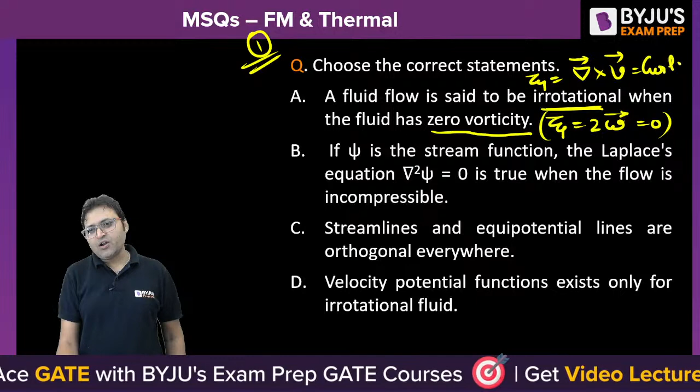Statement A says a fluid flow is said to be irrotational when the fluid has 0 vorticity. Vorticity is twice of angular velocity, and if this is 0, we can say that is called del cross V, or curl of V. If curl of V is equal to 0, then the flow is definitely irrotational. A is correct.

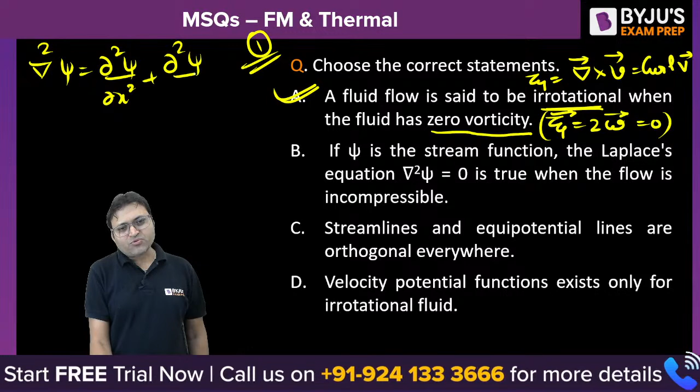What about B? Psi is the stream function. Yes, the Laplace equation del square psi is equal to 0. What is del square psi? That is equal to del square psi by del x square plus del square psi by del y square, equal to 0. This is called the Laplace equation for psi.

The Laplace equation is true when the flow is incompressible. Do you know psi exists for all types of 2-dimensional incompressible flow? So existence of stream function guarantees the flow possibility. The flow is incompressible when psi exists. It does not have to satisfy the Laplace equation.

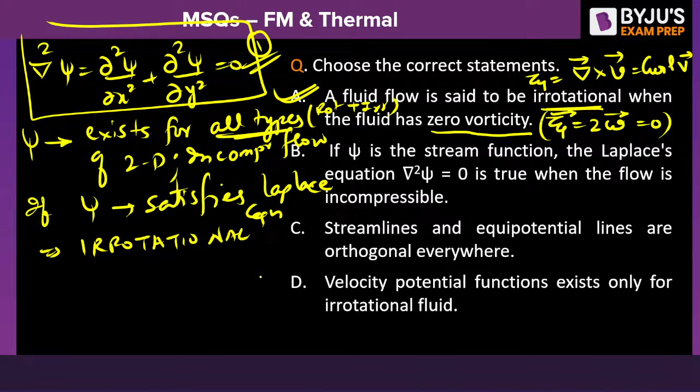When psi satisfies Laplace equation, here people commit a mistake. All types means rotational plus irrotational. If psi satisfies Laplace equation, then the flow is irrotational. Flow is always incompressible. For the flow to be 2-dimensional incompressible, psi does not have to satisfy the Laplace equation. When psi satisfies Laplace equation, the flow is irrotational.

Do you agree with the statement B, which is incorrect? Do you guys agree with the statement B, which is incorrect?

Statement C says stream lines and equipotential lines are orthogonal everywhere. Do you remember? Except at the stagnation point. What is the stagnation point? The point of 0 velocity. At that point the condition does not apply. So stream lines and equipotential lines are always orthogonal to each other in a flow field except at stagnation point. So there is some condition for this. That is the reason statement C is also incorrect.

Velocity potential function exists only for irrotational flow. That is true, that is why potential flow is also called ideal flow. So only A and D. That is how you need to understand each and every statement carefully.

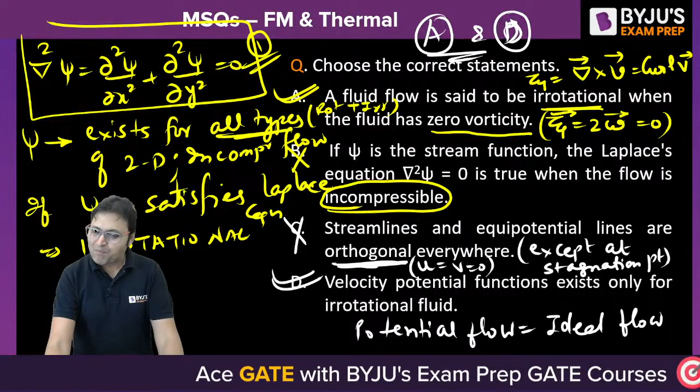It will become more interesting, more fun, more lively, more energetic, right? And more fruitful. The next question, question number 2 on your screen.

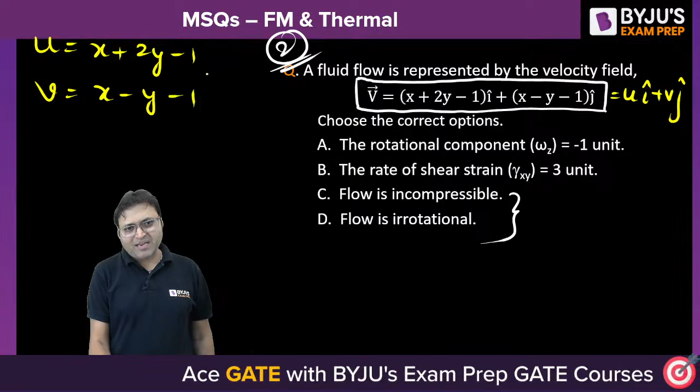Yes. Question number 2, waiting for your response. Everybody please give it a try. First of all, please check whether it is incompressible or compressible out of C and D option.

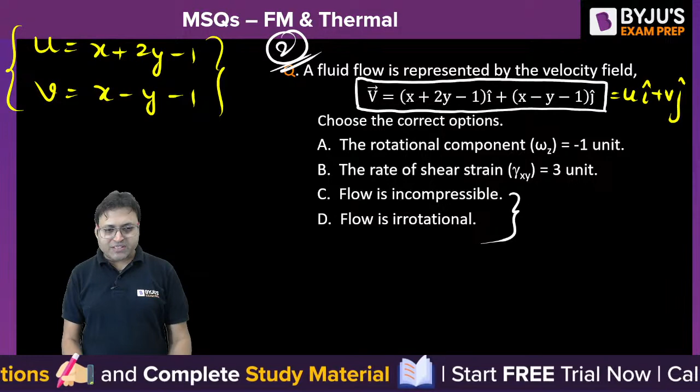Is option C correct or incorrect? How do we check whether a flow is incompressible? We apply the continuity equation for two-dimensional incompressible flow: del u by del x plus del v by del y must be equal to 0.

So what is our LHS? Del u by del x, that is 1, plus del v by del y, that is -1, is equal to 0, equal to RHS. So definitely the flow is incompressible.

Check whether the flow is rotational or irrotational. Find out the angular velocity about the z axis. It is the average of the rate of change of angles of initially drawn perpendicular line segments: del v by del x minus del u by del y. So half of del v by del x, that is 1, minus del u by del y, that is 2. So that becomes -1 by 2, that is 1 minus 2.

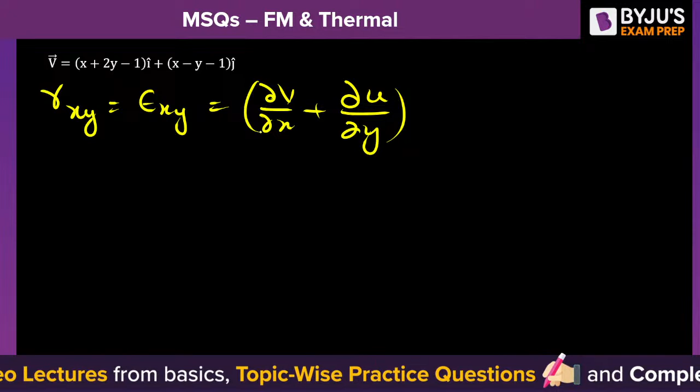What about the rate of shear strain? Epsilon xy is equal to the total rate of change of angles, del v by del x plus del u by del y. Here it will be plus, and half will not be there. So del v by del x is 1, plus del u by del y, that is 2. So this will be 3 units. So the rate of angular deformation or rate of shear strain is definitely 3 units.

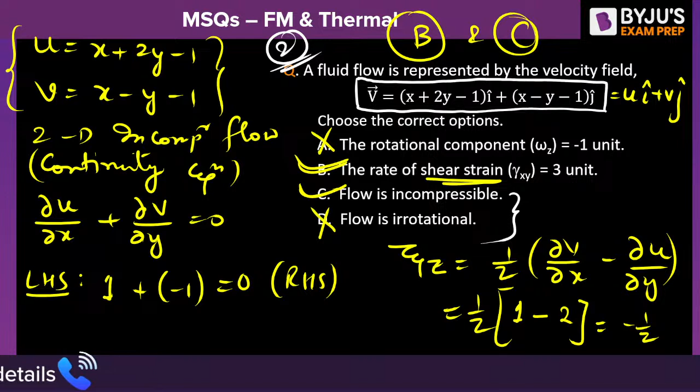So B and C will be the right answer for this one, isn't it? Are you able to understand it? Option B and C are the correct answers.

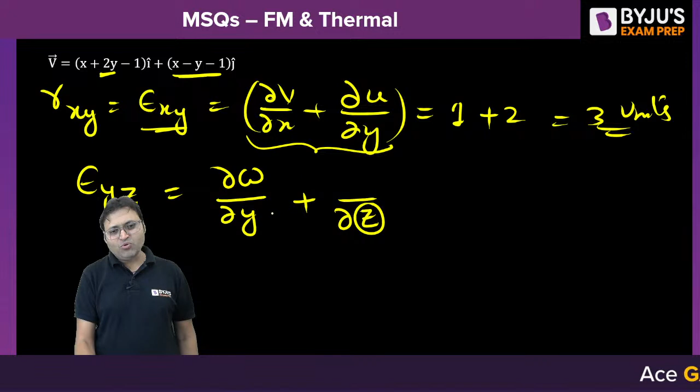If we want to write the rate of angular deformation in the yz plane, then here it will be del y and here it will be del z. The velocity in the z direction is del w, and the numerator of the second term will be the velocity in the y direction. Similarly, epsilon zx will be equal to, here del z, here del x, so it will be del u here, del w here.

So these are the rate of angular deformation which we use in Newton's law of viscosity. Rate of angular deformation, or rate of shear strain, or strain rate, we can also simply call it strain rate.

Pankaj, clear? This is the parameter we use in Newton's law of viscosity: tau is equal to mu into d theta by dt. D theta by dt is the rate of angular deformation.

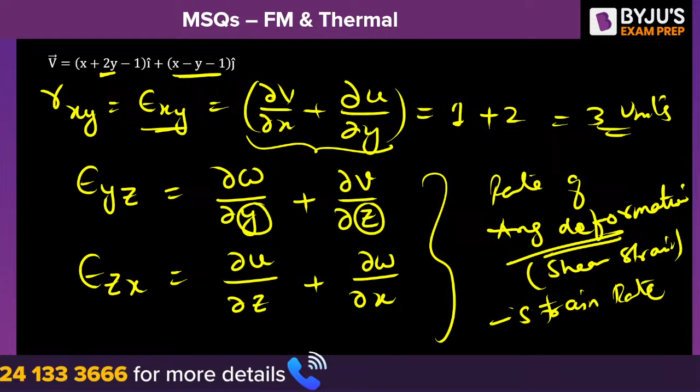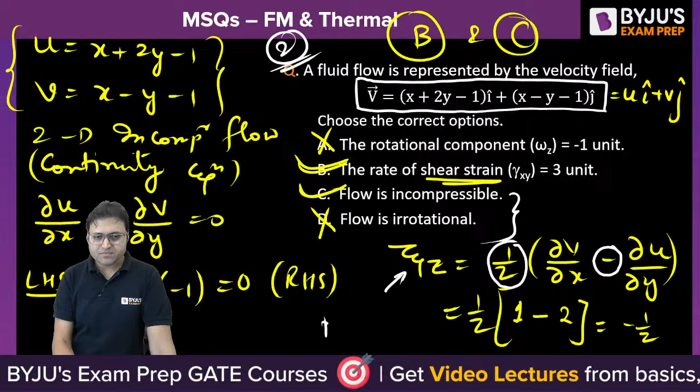There is a slight difference between angular velocity and rate of angular deformation. Try to understand that difference. One difference is that angular velocity has a negative sign in between the terms, and it is the average, so multiplied by half. So angular velocity will have half, then the negative sign in between the terms. That is the angular velocity. I hope it is clear.

The next question is wonderful, question number 3. Try to solve the next one. It might be a little time consuming. The question is about the acceleration of the particle at x equal to 1, y equal to minus 1.

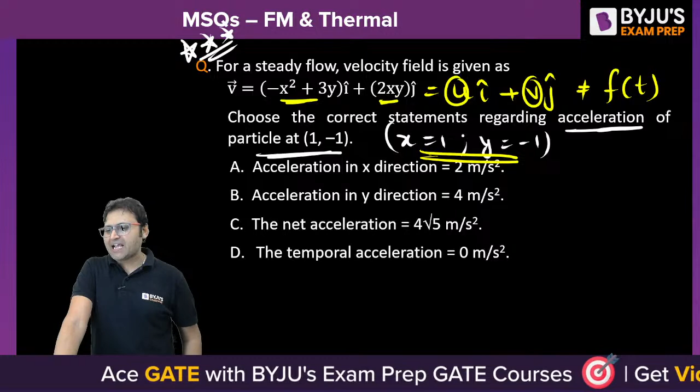We need to find out the acceleration for the given velocity. Can we write it as u i cap plus v j cap? It is not a function of time, there is no time involved, so is D correct or incorrect? Find out the expression for u, find out the expression for v, and you need to find the acceleration in x direction, acceleration in y direction, and the net acceleration. Everybody please give it a try. This is question number 3.

Let me give you a hint that option D is correct, definitely correct, because velocity is not a function of time. That is why the temporal or local acceleration is 0. Temporal acceleration means local acceleration. So D will be correct. Now out of A, B and C.

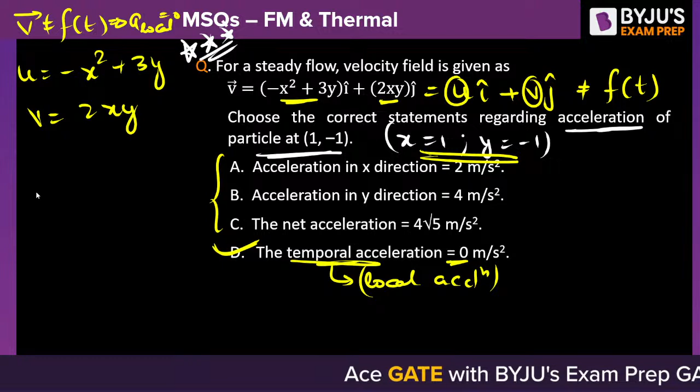So u is equal to minus x square plus 3y, and v is equal to 2xy. Now what is the acceleration in x direction? It is just a formula based question: ax equals u into del u by del x plus v into del u by del y. So u is minus x square plus 3y, into del u by del x, which is minus 2x, then plus v, that is 2xy, into del u by del y, which is 3.

Did I write it correctly? X is equal to 1, Y is equal to minus 1, Y is equal to minus 1. Tell me.

Minus 2x minus x square plus 3y square. It is not 3y square, sorry, it is not 3y square. It is 3y, it is 3y. So y is equal to minus 1, y is equal to minus 1, so it will be minus, so it will become, sorry,

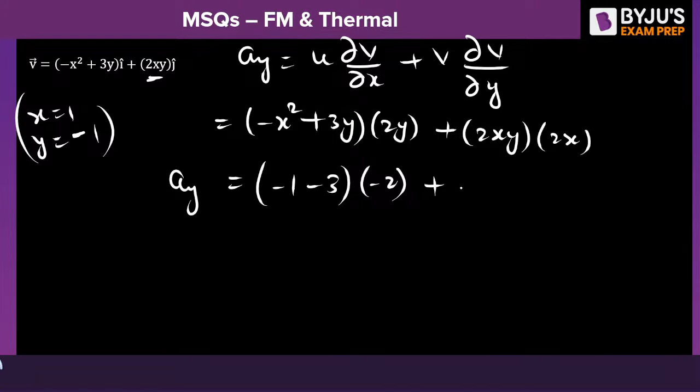Put the values. So AY is equal to, x is equal to 1, so minus 1, minus 3, then 2y, that will be minus 2, plus 2xy, minus 2 into 2x, then 2. So it will be 8 minus 4, 4 units. AY will be 4. AY will be 4. B is also correct.

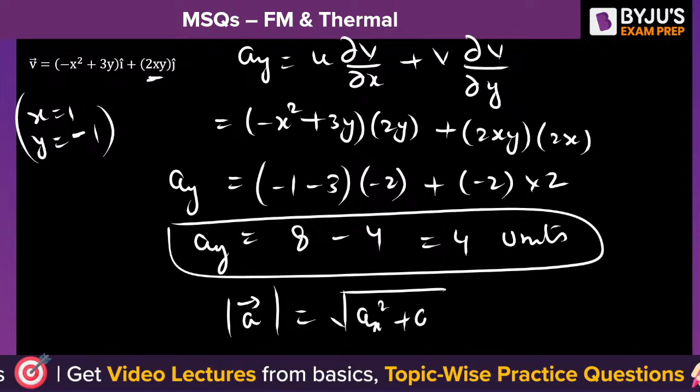What about C? What about C? The net acceleration is equal to under root of ax square plus ay square, that is under root of 2 square plus 4 square, that is root 20, that is 2 root 5. It will be 2 root 5. It will not be 4 root 5.

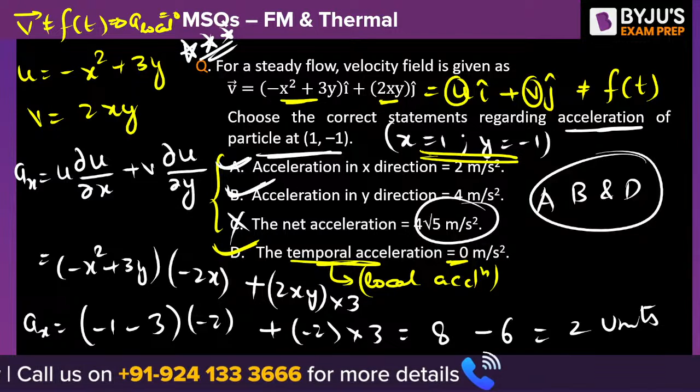It will be 2 root 5. So A, B and D are the correct options. A, B and D are correct answers. Yes, well done. A, B and D will be the right answer for this one. I hope it is clear. Total acceleration is 2 root 5, 4.47, correct. It will not be 4 root 5. So option C is incorrect. A and B are correct and D is also correct.

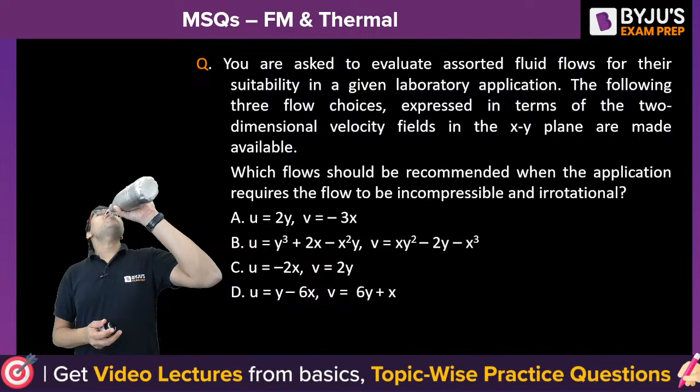The next question is simple, but can you do the calculation correctly? Next question you are supposed to give me the answer for. Next question you guys are supposed to solve.

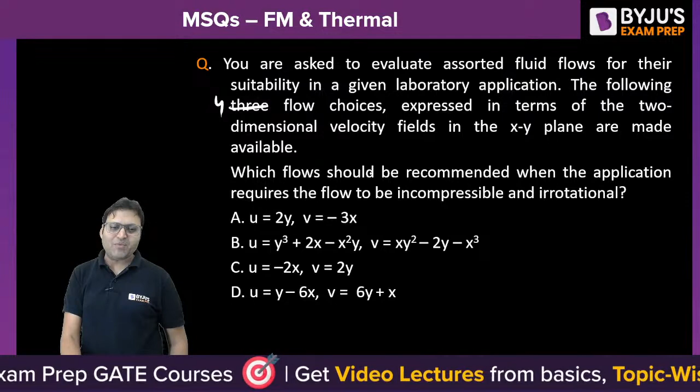So the next question, you are asked to evaluate assorted fluid flows for their suitability in a given laboratory application. There are 4 flow choices expressed in terms of a 2-dimensional velocity field in the x and y plane made available. Which flow should be recommended when the application requires the flow to be incompressible and irrotational?

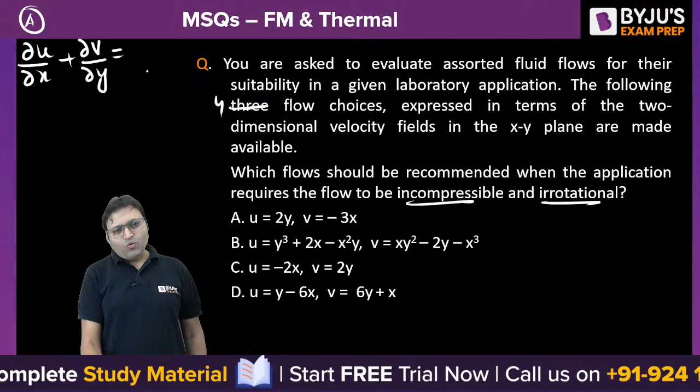Incompressible and irrotational. If we talk about A, what is del u by del x plus del v by del y? What is del u by del x? 0. What is del v by del y? 0, so it is equal to 0. It means incompressible. A is incompressible. What about irrotational?

Del V by del X minus del U by del Y, isn't it? Can you find out del V by del X minus del U by del Y? What is del V by del X? That is minus 3, minus del U by del Y, 2. That is not 0. It means rotational. So A cannot be the correct answer.

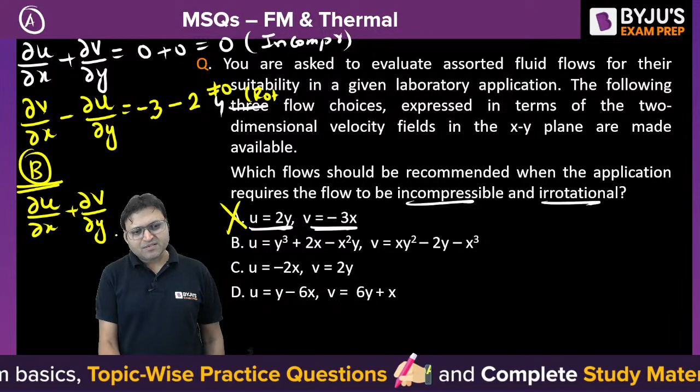A cannot be correct. Let us talk about B. What is del U by del X plus del V by del Y? Can you find out the value? Del U by del X, what is del U by del X? 2 minus 2xy, plus what is del V by del Y? That is 2xy minus 2. So do you get it? 0. So B is also incompressible.

And what about rotationality?

Del V by del X minus del U by del Y. What is del V by del X? Del V by del X is y square minus 3x square, then minus del U by del Y is 3y square minus 2x square. Del U by del Y, na, x square. So is it 0? It is not 0. It means it is also rotational. So A and B are incompressible but rotational flow.

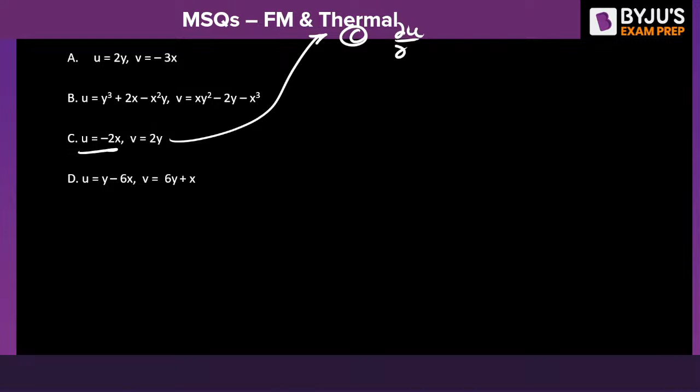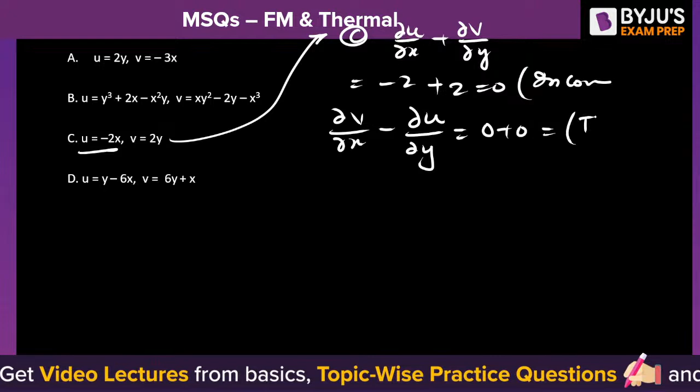Similarly, can you find out for C and D? If we talk about C, what is del U by del X? It is little time consuming though. Del U by del X is minus 2, plus what is del V by del Y? Then that is 2, so that is incompressible. And what is del V by del X minus del U by del Y? What is del V by del X? 0, 0. They are 0, 0. That is irrotational. So C is correct.

What about D? Option D. Del U by del X plus del V by del Y. What is del U by del X? Minus 6, plus del V by del Y, that is 6. 0. Incompressible.

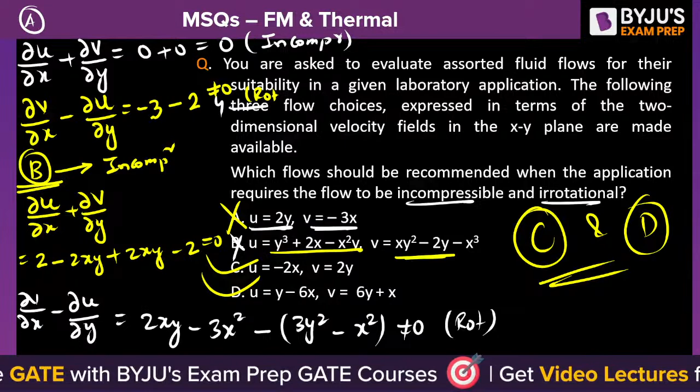All are incompressible. Then del V by del X minus del U by del Y. Do not commit the mistake. Del V by del X, that is 1, minus del U by del Y, that is 1. 1 minus 1, 0. That is irrotational. So C and D are incompressible as well as irrotational. C and D both are incompressible and irrotational. So answer to this question are C and D, isn't it? Answer to this question will be C and D.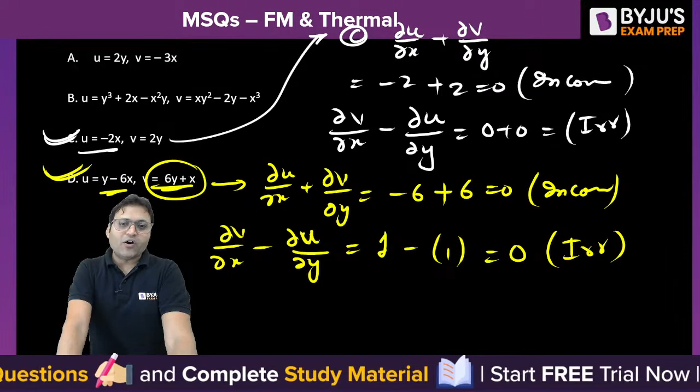I hope it is clear to everyone. Are you guys enjoying it or not? So there can be numericals also for MSQs. There can be theoretical questions. Theoretical questions are more confusing compared to numericals, right?

Let us move to the next one. The next question on your screen. Out of options A and B, one of them is correct, and out of C and D, one option is correct. Yes, in a Lagrangian system, the position of a fluid particle in the flow is described as, this is how the position changes in X direction and the position changes in Y direction by this expression, where T is the time while X0, Y0 and K are some random constants.

The flow is option A and B. Which of them is correct? The flow is... steady or unsteady? Yes, I want everyone to get me the answer. A and B, which of them is correct? Forget about C and D. Let me know whether the flow is steady or unsteady.

Do you know the definition of steady and unsteady flow? Will the flow be steady or unsteady? Every one of you, will the flow be steady or unsteady? Yes, it is fun. The flow will be steady only. No, it means you guys do not have

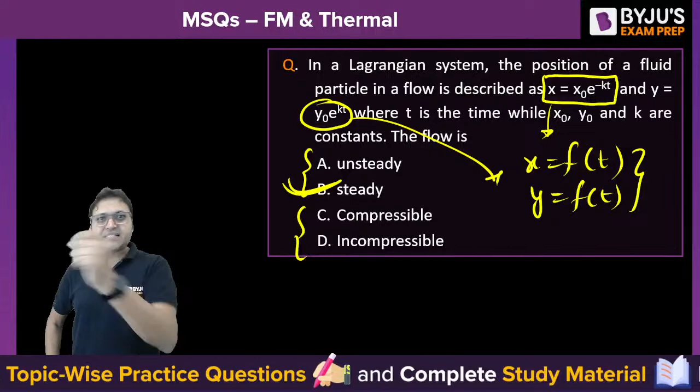Let me tell you, whenever there is a flow, the position of the particle will definitely change with time. Whether the flow is steady or unsteady, the position of the particle will always change with time, whether the flow is steady or unsteady. That will happen, right, the position of particles will change with time. So does this mean you are trying to say there cannot be a steady flow in reality? Is that what you are trying to say? Are you trying to say that steady flow does not exist?

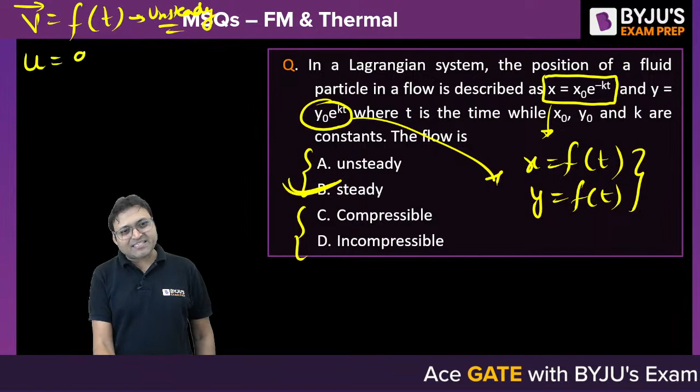So how to find out the velocity in x direction? This is dx by dt. U is equal to dx by dt. Can you find out the value of dx by dt? Differentiate with respect to time: x naught into minus k into e to the power minus kt, isn't it?

And x naught into e to the power minus kt is x only. So u is equal to minus kx.

Are you getting it? Similarly, v is equal to total derivative of y with time, dy by dt, and y is given by y naught e to the power kt. So it becomes y naught into k e to the power kt. Are you getting it or not? So y naught e to the power kt is again y. So v is equal to k into y.

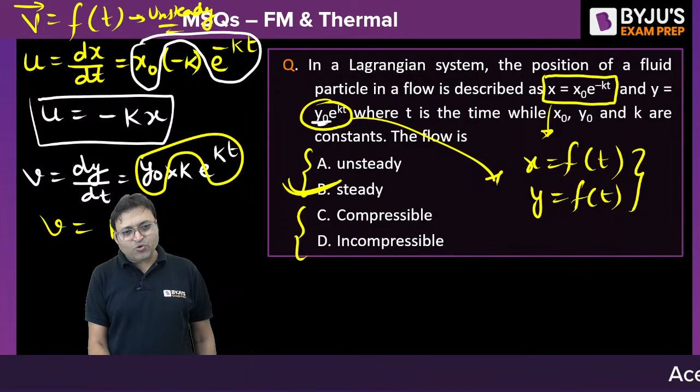So it is not a function of time, it is independent of time. U and v - can we say the velocity is a function of x and y only? So the flow is steady. Are you getting it or not? So the flow will be steady, it will not be unsteady.

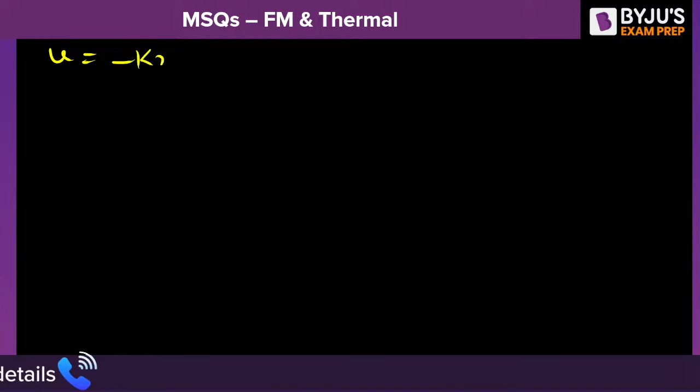Now you need to check whether the flow is compressible or incompressible. We can check: U is equal to minus kx, and V is equal to ky. So what is del u by del x plus del v by del y?

Check the continuity equation for two-dimensional incompressible flow. Del u by del x is what? Del u by del x is minus k, plus del v by del y, which is k. That equals 0. So it will be incompressible. The flow will be steady and incompressible.

B and D are the correct answers for this question.

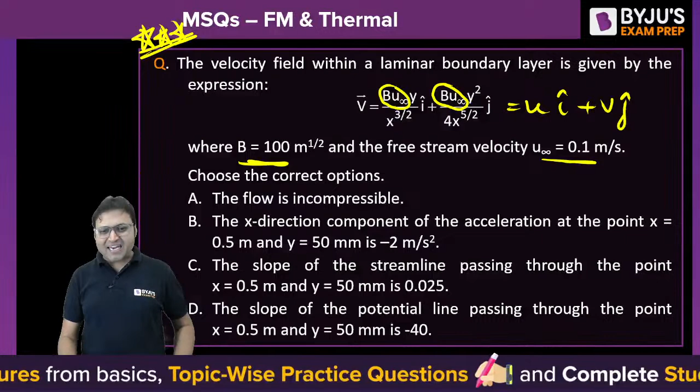The question says choose the correct option: the flow is incompressible. You need to check whether the flow is compressible or incompressible. The x direction component of acceleration at point x equals 0.5, y equals 50 mm, one in meter, another in mm, is -2, ax. Check whether ax is -2 or not. The slope of the streamline passing through the point x equals 0.5 and y equals 50 mm is 0.025. Let us first find out C and D option.

Let us try to focus on C and D. What is the slope of streamline? The slope of streamline is dy by dx is equal to v by u, isn't it? Slope of streamline, dy by dx is equal to v by u. What is v?

V is this expression. So can I write v as y square, because B into u infinity will get cancelled out. Let me write it as y square upon 4x to the power 5 by 2, multiplied by x to the power 3 by 2 upon y, isn't it? That is v by u. B into u infinity will get cancelled out.

Now can you find out the slope at x equals 0.5 and y equals 50 mm? What is 50 mm? 0.05. So put the value. Can we write it as 1 by 4, and y square upon y is simply y into x to the power 3 by 2 minus 5 by 2 minus 1, isn't it?

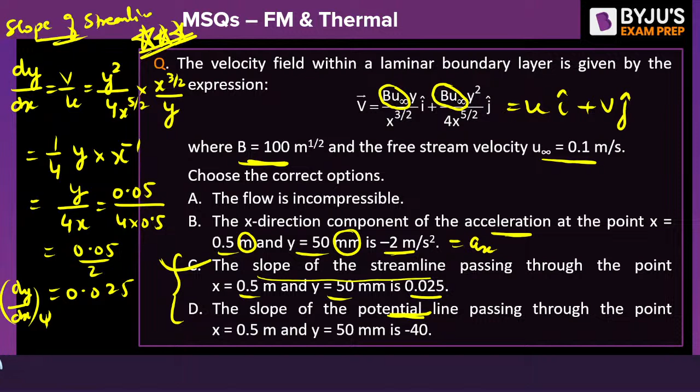The slope of the potential line - streamlines and potential lines are orthogonal to each other. So can we say the slope of potential line dy by dx for potential line is equal to minus 1 upon 0.025, isn't it? So what is minus 1 upon 0.025? Minus 40. Are you getting it? Minus 40. C and D are correct. It will be minus 1, Rohan, so minus 40 will be the answer. So C and D are correct. What about A and B?

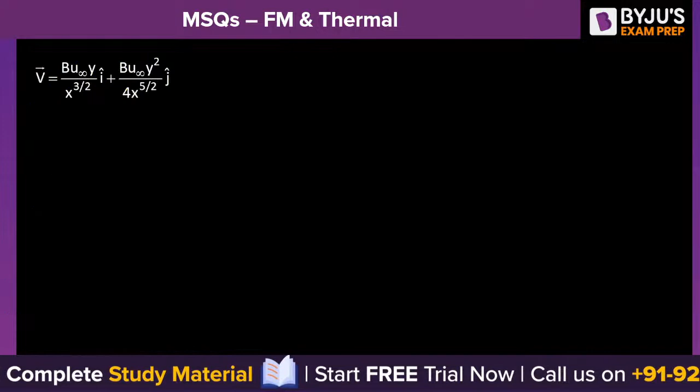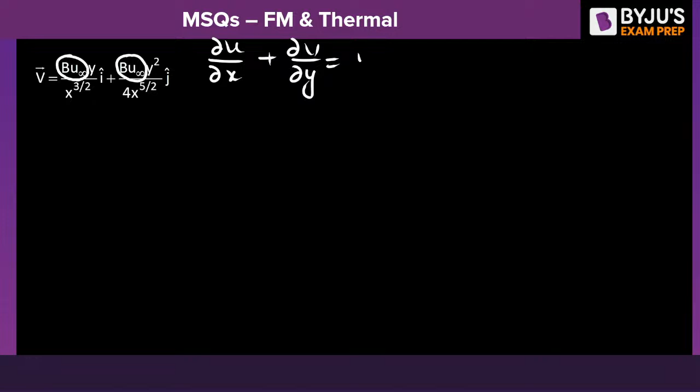Let us talk about A. What is del U by del X plus del V by del Y? What is del U by del X? Take B into U infinity outside. B into U infinity, what is del U by del X? It will be Y into x to the power minus 3 by 2. So it will be minus 3 by 2 into minus 3 by 2 minus 1 minus 5 by 2, isn't it?

Plus del V by del Y, then 1 upon 4 x to the power 5 by 2. Del V by del Y, that is 2y. This will be the expression. So it will be minus 3 by 2 into y equals 0.05 upon x to the power 5 by 2. What is x? 0.5 to the power 5 by 2, plus 2 into 0.05 upon 4 into x to the power, or we can write it as 1 by 2, into 0.5 to the power 5 by 2.

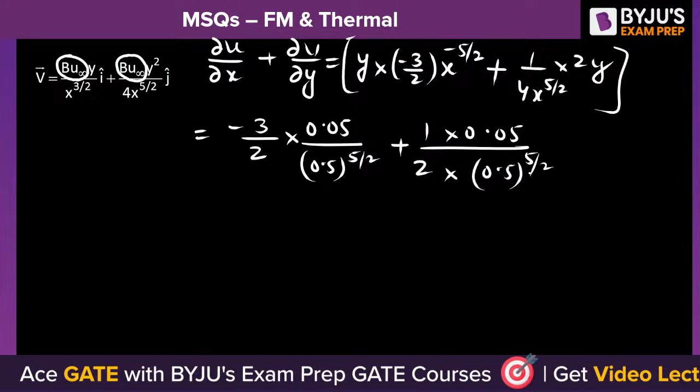Are you getting incompressible or not? It is not 0, it is definitely not 0. So A is incorrect. What about B? Can you solve for B? So it is compressible, so C and D.

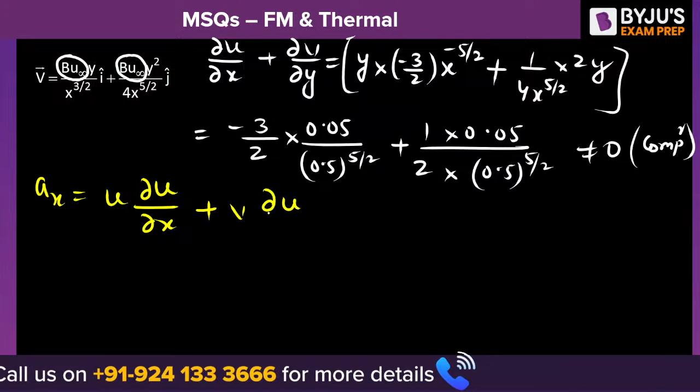What about option B? I am not going to solve for option B. Ax is equal to U into del U by del X plus V into del U by del Y. If you will do the calculation at X equals 0.5 meter and Y equals 0.05 meter, if you will not commit any mistake, then acceleration will come out to be... did anyone solve it?

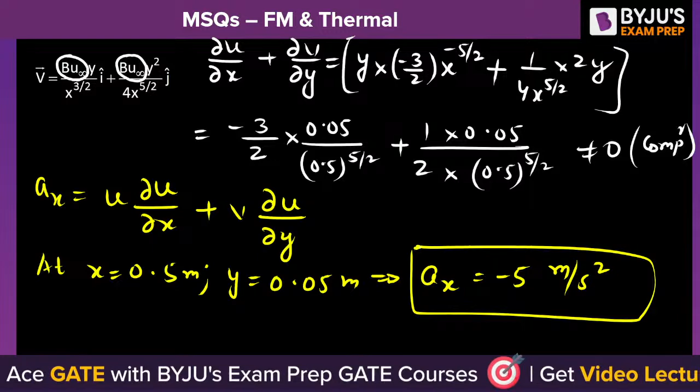Did anyone solve it? Ax will come out to be minus 5 meter per second square. Definitely it will not be minus 2. So C and D are the correct answers for the given question. I hope it is clear. I am not solving Ax, you do it on your own.

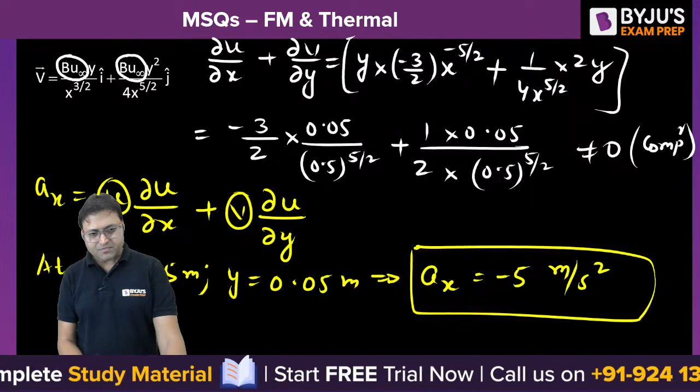Put the value of u, calculate del u by del x, put the value of v, calculate del u by del y, and finally put x is equal to 0.5 and y.

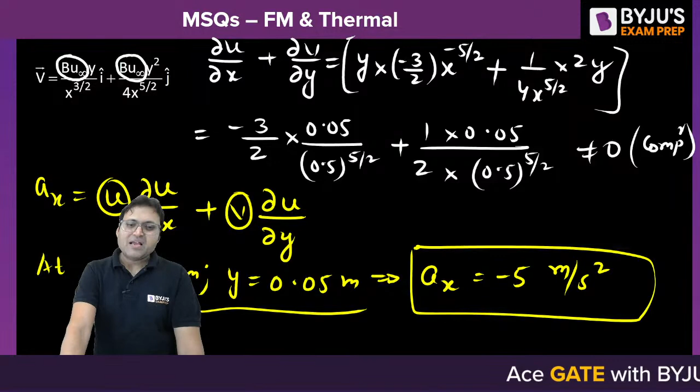Yes, it is lengthy, but it can be asked. Only A, C, D options are not that lengthy. C and D options are not that lengthy. A is also fine, but calculating the acceleration is a tedious task actually. B is wrong, yes B is wrong. A and B are wrong, C and D are correct. Well done, good, alright let's move ahead.

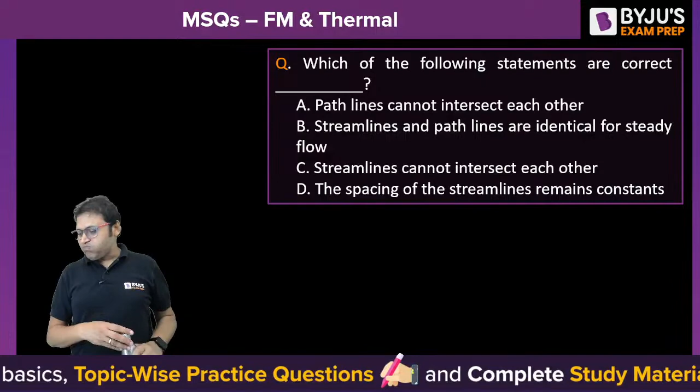Now let's bring a slightly simpler question, that one was a bit lengthy. You all will answer the next question. The next question - you are supposed to give me the answer for the next one. Quickly, you should be quick for theoretical questions, quick and accurate. What about next one, everyone?

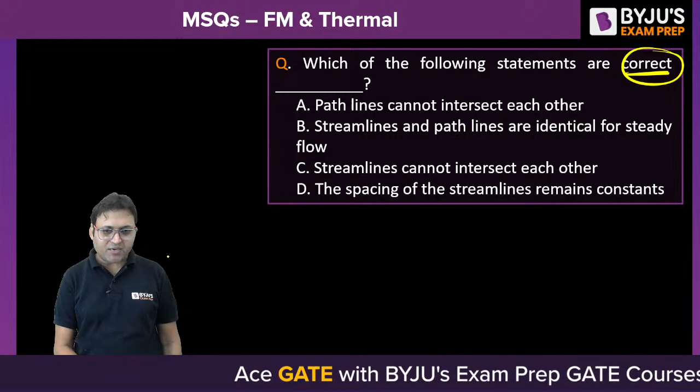Path line cannot intersect each other. Path line can intersect each other. Path line can intersect each other. There is no problem in the path line. Path line can intersect - in case of turbulent flow, path lines intersect. Whenever the flow is turbulent, path lines intersect with each other. Streamlines and path lines are identical for steady flow. Yes, whenever the flow is steady, streamline, path line and streak lines become identical.

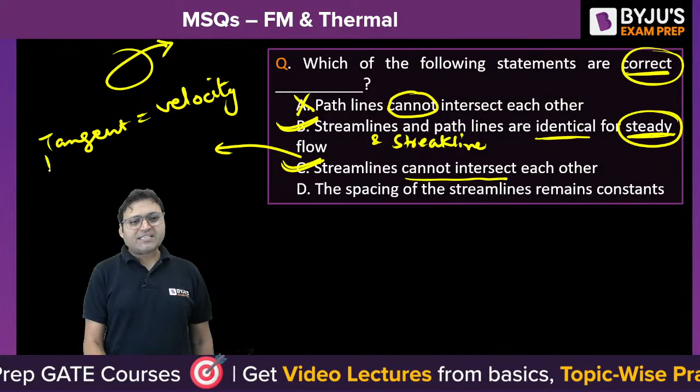B is true, B is true. A is wrong Pankaj, A is wrong. Why are you saying A? Path line can intersect, path line can intersect. A is an incorrect statement - yes, streamline cannot intersect. Why? Because tangent is equal to velocity. Tangent to the streamline is equal to velocity. Tangent to the streamline is velocity, and when streamlines intersect, there will be two tangents. At the intersection point, there will be two tangents. So there will be two velocities, which is impossible. So streamlines cannot intersect each other.

That is correct - you read 'cannot' as 'can', that's the mistake that happens. C is correct. What about D? The spacing of the streamlines remains constant - no, as the velocity increases, the spacing between the streamlines decreases, or if velocity decreases, the spacing between the streamlines increases, for steady flow, for Q to be constant. So spacing of the streamlines does not remain constant, it changes.

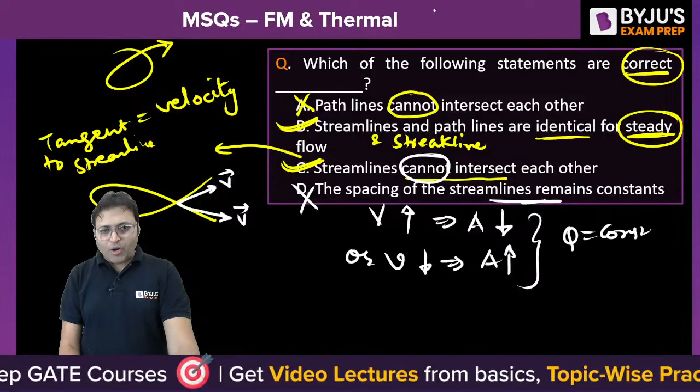Streamlines can converge, streamlines can diverge. Streamlines can converge, streamlines can diverge. Are you getting it? So option B and C are correct. Only option B and C.

How many people gave the right answer? No one, no one gave the correct answer. Right, B and C are the correct answers. The spacing between the streamlines converges - in case of a nozzle, area decreases. This is a nozzle, in nozzle streamlines converge. In diffuser, streamline diverges. So the spacing does not remain constant.

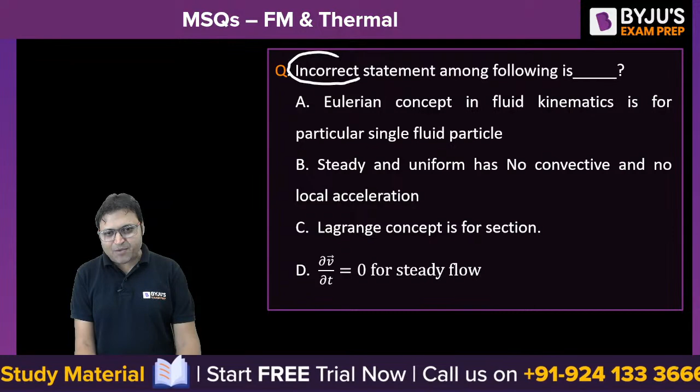Theoretical question - theoretical questions are more dangerous. The question is about the incorrect statement - don't misread it. The question is about the incorrect statement, it is not about correct, it is about incorrect. Eulerian concept - Eulerian concept is applied to a particular section. Eulerian concept in fluid kinematics is for a particular single fluid particle - no, it is for a section, for a section, or we can call it control volume. It is called the control volume approach. So statement A is incorrect.

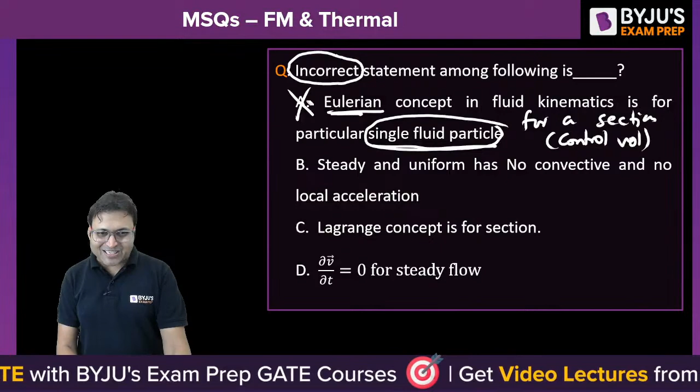So the question is to find out the incorrect statement, the question is to find out the incorrect statement. Steady and uniform flow has no convective and no local acceleration - that is correct. The correct statement should not be selected. You need to select the incorrect statement, isn't it? The Lagrangian concept is for a section - no, it is for a particle.

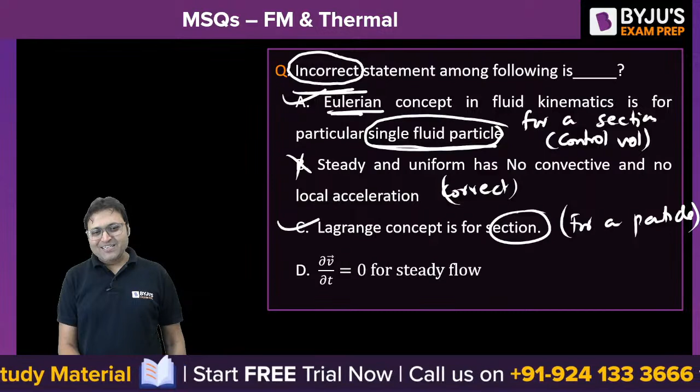It is for a particle, so that is why C is correct. Del V by del T is equal to 0 for a steady flow - yes, that is called local acceleration. Local acceleration is 0, that is correct. So that is why you cannot select that as the correct statement. Lagrangian approach is for a particle and Eulerian approach is for a section.

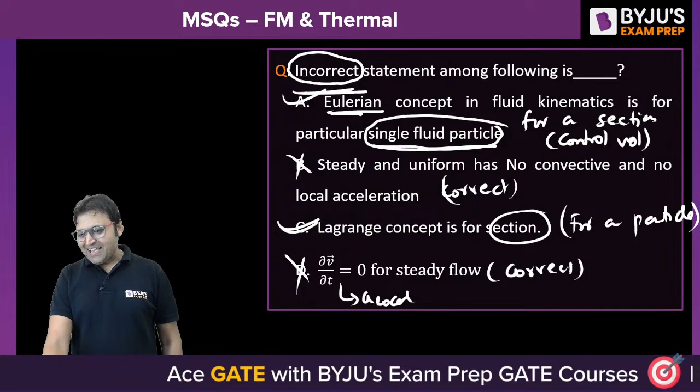Alright, so A and C. Well done, so many students have given the correct answer. A and C are the correct answer for this one. Let us move to the next one.

The next question: choose the correct statement out of the given options. You are supposed to choose the right statement. Give it a try, every one of you.

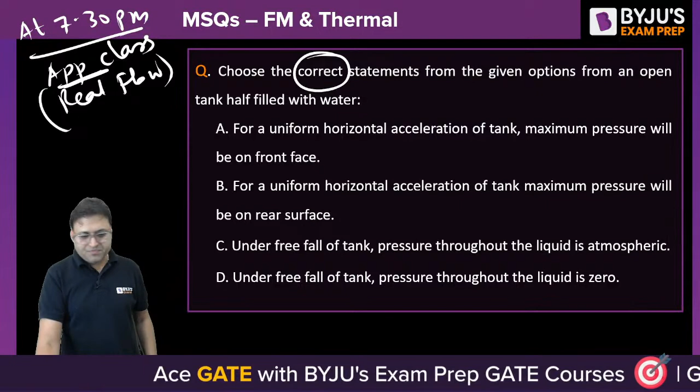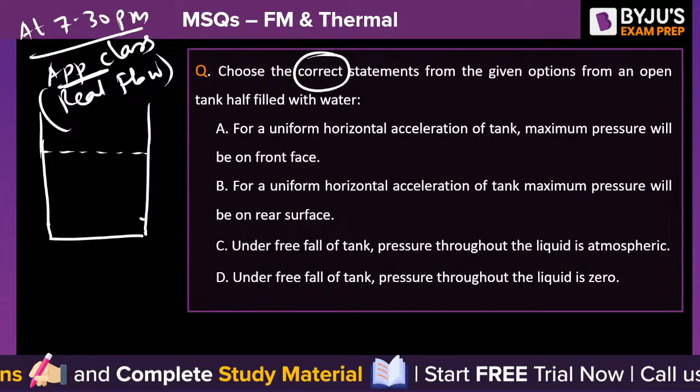For a uniform horizontal acceleration, it is from the rigid body motion. If the container is given a horizontal acceleration in the right hand side, then the free surface will be like this.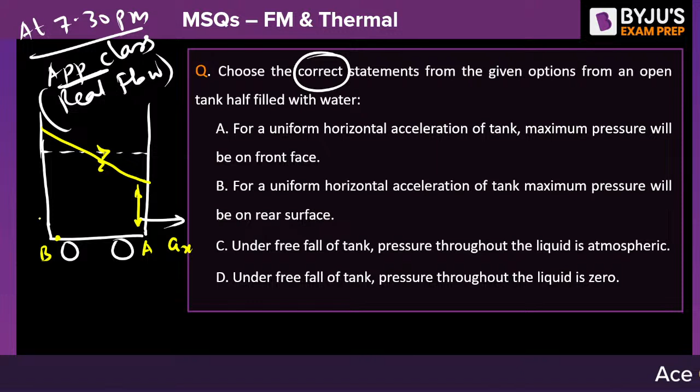For a uniform horizontal acceleration of the tank, maximum pressure will be on the front side - no, it will be lesser. Pressure at A will be less than pressure at B. Pressure at B will be more. PB will be greater than PA. So A is incorrect, the maximum pressure will be on the rear surface. B is correct.

Maximum pressure will be on the rear surface, right? Under free fall of the tank...

When the container is having a free fall, pressure throughout the liquid is P atmospheric. That is true, the pressure is neither a function of X, nor Y, nor Z. It remains constant, that is P atm, everywhere. It is not 0, it is atmospheric.

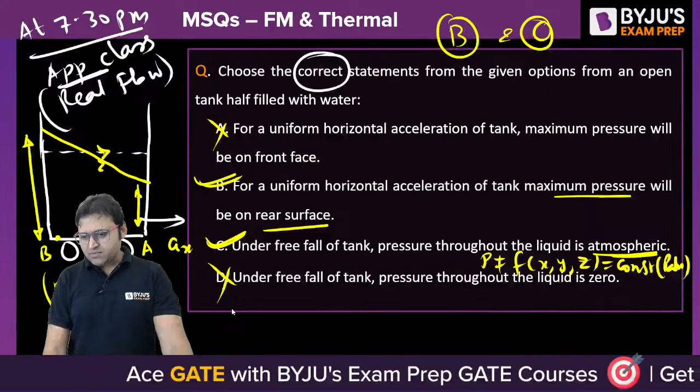So B and C are the correct answer for this one. B and C will be the right answer. Gauge pressure will be 0. I hope it is clear.

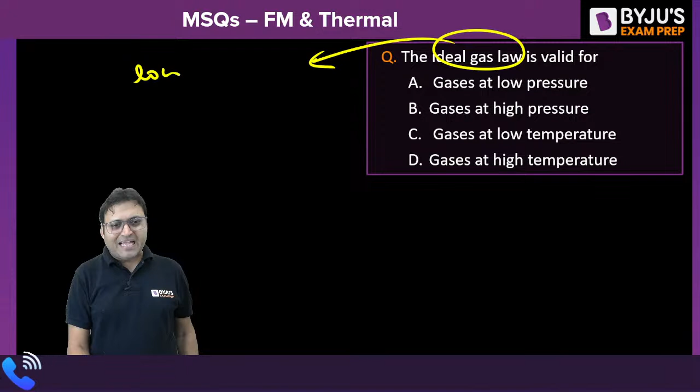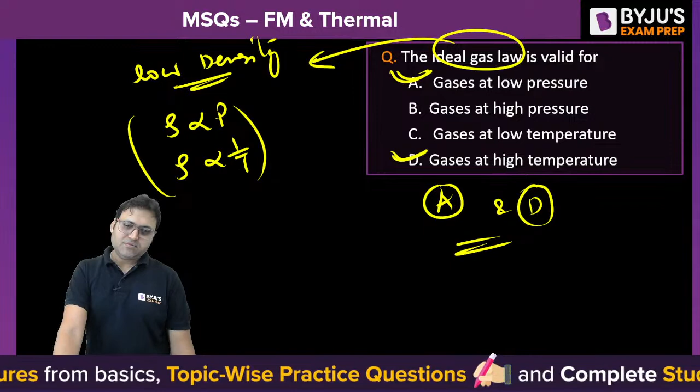Next question: consider a piston cylinder device which contains an ideal gas. The gas undergoes two successive cooling processes by rejecting heat to the surrounding. First, the gas is cooled at constant pressure.

If I draw the PV diagram, first the gas is cooled at constant pressure. This is a constant pressure cooling process, from 1 to 2, where volume is directly proportional to temperature, until T2 becomes 3 by 4 of T1. So T2 by T1 is equal to 3 by 4.

Then the piston is held stationary, meaning volume remains constant. The gas is further cooled, from 2 to 3, a constant volume process where pressure is directly proportional to temperature. And T3 by T1 is equal to 1 by 2, where all temperatures are in Kelvin.

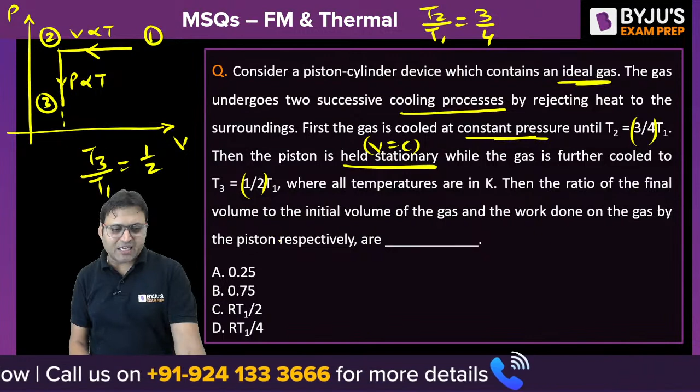Now, the ratio of the final volume to the initial volume, V3 by V1. Can we say V3 is equal to V2? So it becomes V2 by V1. Can we say V2 by V1 is equal to T2 by T1? And what is T2 by T1? That is 3 by 4. So isn't it 3 by 4, or 0.75?

Out of options A and B - this question wasn't framed very well. Options A and B are for V3 by V1, and options C and D are for work done. So B is the correct answer for V3 by V1.

Now what about work done? W for 2 to 3 is equal to 0 because it is a constant volume process. So W total is equal to W for 1 to 2. What is this work? Pressure into volume, V1 minus V2, or P1V1 minus P2V2. P1V1 is MRT1 minus MRT2. Can we write W equals MR(T1-T2), or M into R into T1, times 1 minus T2 by T1?

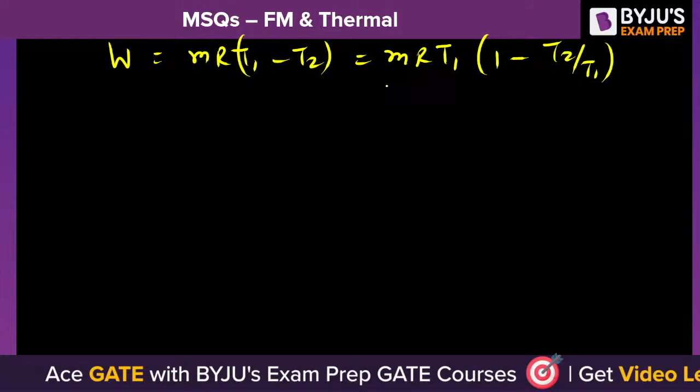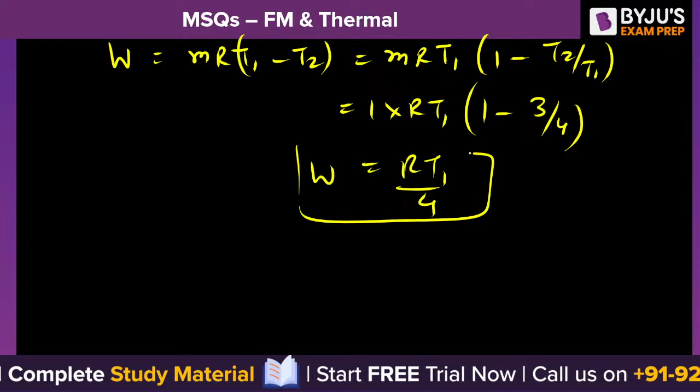With M equal to 1, R into T1 times 1 minus T2 by T1. What is T2 by T1? It is 3 by 4. So that gives RT1 by 4. D is the correct answer.